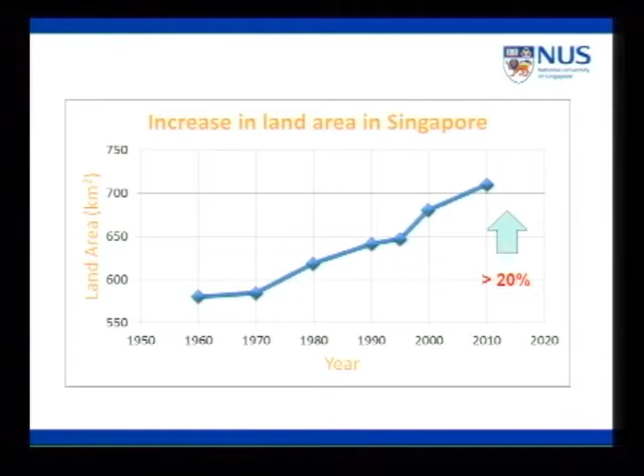Some of you may not be quite aware that Singapore started with, I'm just tracking the statistics from 1960, an island of an area of about 580 square kilometers. Over the past 50-odd years, the size of the island went up by 20%, and this is entirely man-made, by the way. I think this is a record for independent nations. I'm not sure whether there's any country that can grow at that rate. This is like the growth rate of a baby, right? But it is, to me, pretty amazing when I look at the statistics.

Now, this large-scale coastal reclamation essentially began in the 1970s in Singapore. We did have reclamation prior to the 1970s using some of the hill-cut materials in Singapore, but subsequently it immediately ran out of hills. That's quite obvious. No more hills for us to cut. And one of the very famous projects at that point in time in the 70s was Changi Airport. Not the current Changi Airport, the original Changi Airport. The whole project took place from 75 to 79, over a period of about four-odd years.

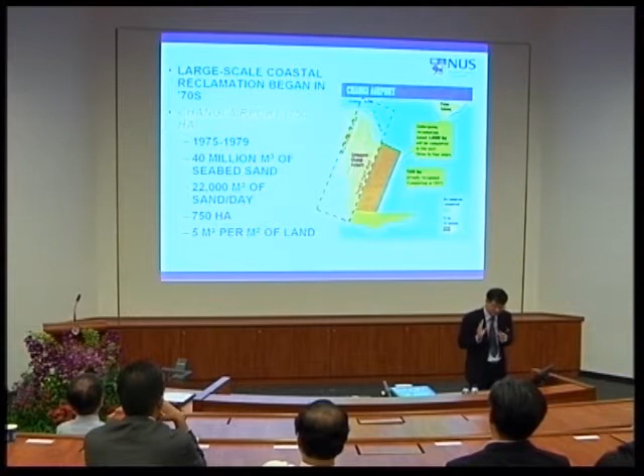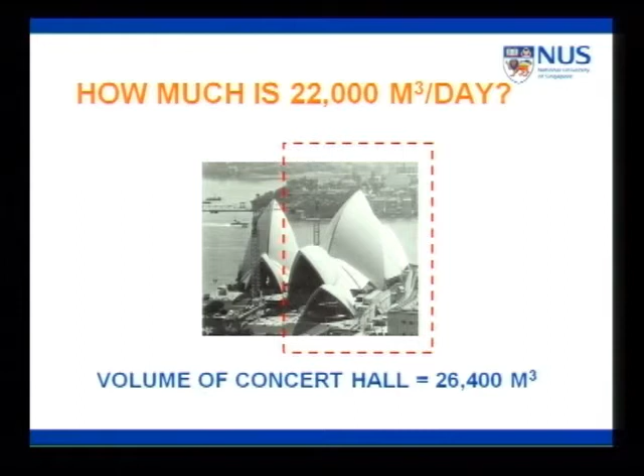How much is 22,000 cubic meters per day? I thought volume is not something that people can appreciate. So I just took one very famous structure, and some of you could have visited it: the Sydney Opera House. The Sydney Opera House would have a volume of 26,400 cubic meters. And if you look at the numbers I just cited, 22,000 cubic meters of sand per day, you're dumping a Sydney Opera House into the sea every single day.

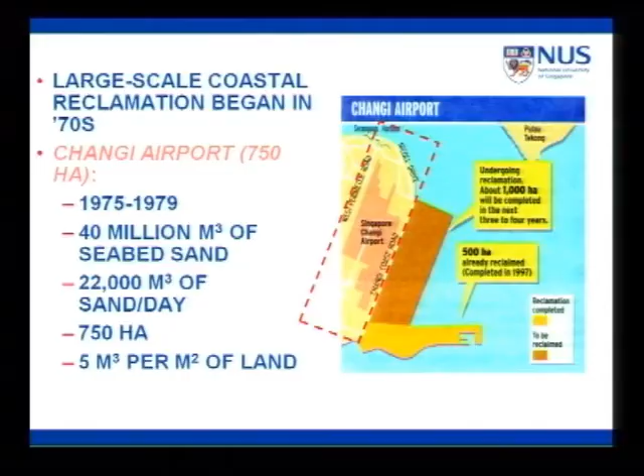That is a massive job, by the way. And many, many little things, very clever, very neat things that we can think about that we want to do, nothing works at that scale. The scale will simply defeat all your ingenuity.

I thought I would run through this, since not all of you are working in this area, and this is something that perhaps I could acquaint you with. The whole procedure of reclamation is quite simple. Imagine this is your original sea coast. You wanted to move your land laterally by this amount.

The first thing you need to do is to construct a sand key. That is to retain the fill that you will be dropping into this retained portion. And this sand key is something that I would actually skip to at the end of my lecture. So you want to bear in mind a sand key is essentially a retaining structure. And the way we do it is very simple.

We dig a big trench in the sea, and we replace this trench by sand. The reason is because in order for this structure to be stable, you need to have a solid foundation. So there's like a foundation to ensure the stability of the new shoreline. This is a very interesting picture. You notice that to do this piece of work, you already have to dredge seabed materials. And when you dredge this seabed material, by the way, you cannot throw it

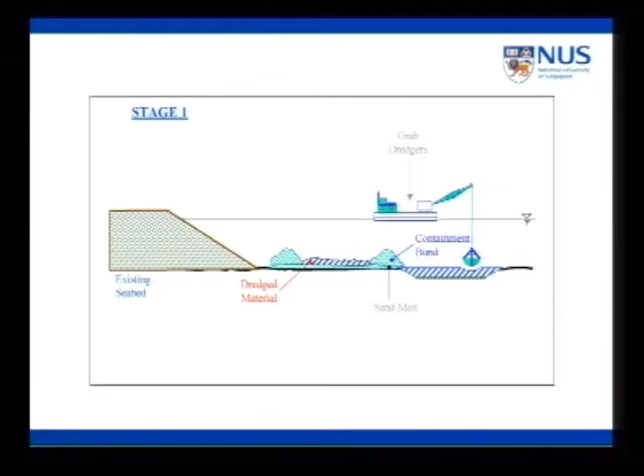elsewhere. Singapore is not only very, very small in terms of land area, Singapore has very, very tight navigational channels. The sea is being used for shipping. You cannot go around damaging these lanes. That is obviously not desirable. So the usual trick is to just dump the dredged material into this over a sand blanket, and then you basically rain sand on top of it using some fairly big barges.

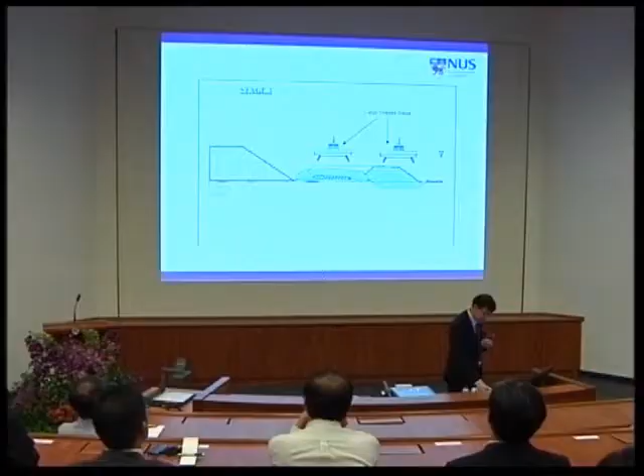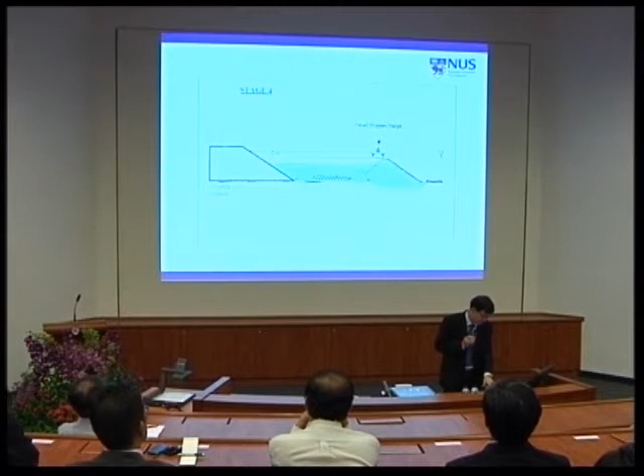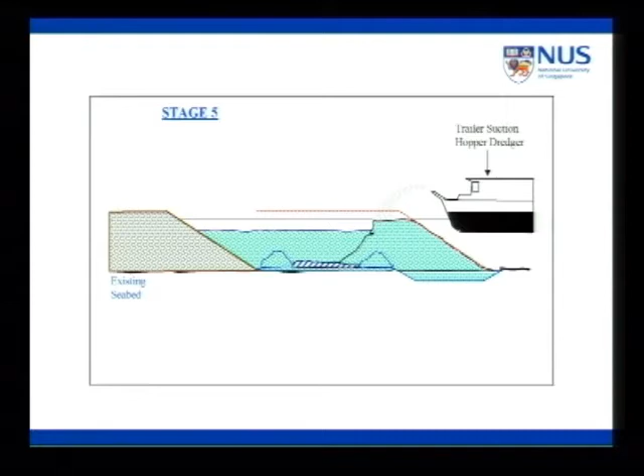And when the land rises near to the sea level, you bring in the smaller barges because you don't have enough draft for these barges to enter into these shallow areas. And then subsequently, it becomes so shallow that your small little barges couldn't come in. And you just keep raining sand using a trailer suction hopper dredger. So basically, these are all sand, hydraulic sand mixed with water, and you're just pumping this sand continuously.

So this picture is basically telling you how you dump this Sydney Opera House scale of sand to reclaim your land. That will give you a good impression, I guess. Now the story gets more interesting because notice that the original Changi Airport was reclaimed in the 70s. And then, of course, this entire construction procedure never stops. We were reclaiming land all over the place. So these are just some of the examples that I'm sharing with you.

For example, in Pulau Tekong, we did it in the early 80s, and that requires 5.5 cubic meters per square meter of land. The water starts to get deeper. This is common sense because the seabed has to go deeper, right? As you reclaim outwards, you have to go into deeper and deeper water. In fact, by the early 90s, roughly 10 years ago, in Changi East, the new extension, you are already dealing with 13 cubic meters per square meter of land. So you can see the trend.

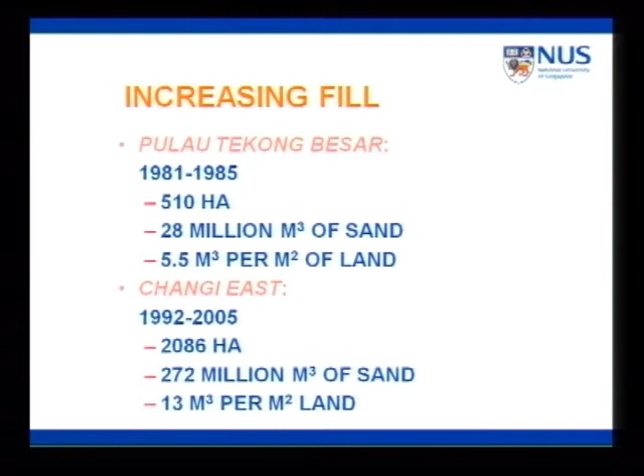The trend shows that it's getting more and more difficult because to reclaim that single extra square meter, you end up having to dump in a lot more sand. Now you're at a volume of 272 million cubic meters of sand. So if you add another zero, you'll be in the giga scale. This is no longer mega scale, but giga scale magnitude. And then this is very difficult.

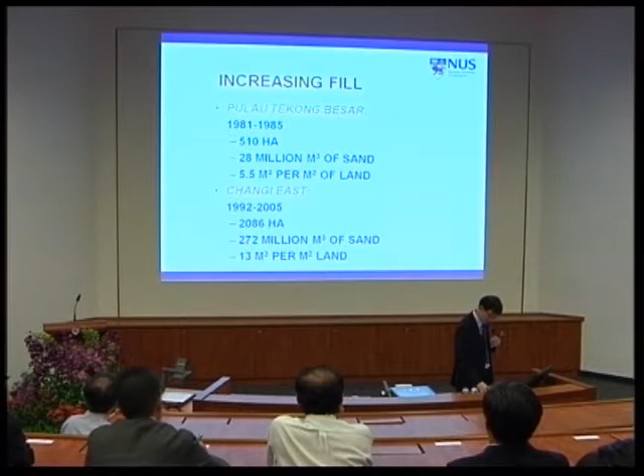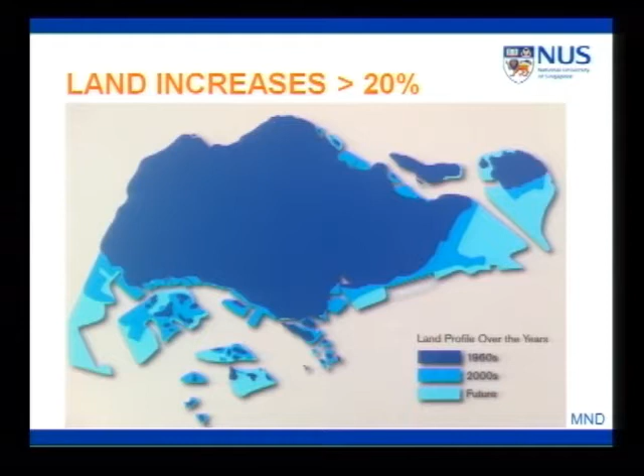As I've said, this may be a cleaner picture, the way I took it from MND. Again, it shows you very visually how fast we are growing and all the new pieces of land we are creating. That is very impressive, 20% as I've said just now. But the population of Singapore has also been increasing, as all of you know. We started off with something like 1.8 million people in the 1960s, and currently there are like 5 million inhabitants on this island.

So this is the rate of growth. If you take the extra piece of land and divide by this number of people, you will end up showing that despite this tremendous 20% growth in the size of our land area, we are indeed getting denser. This is population density: simply taking your population, divided by the land area of your island.

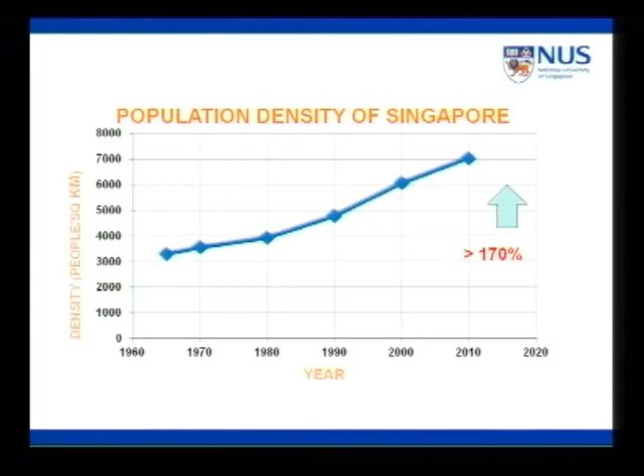And as I've said, this is 1.8 million in 1960, and then this is 5 million. If you just divide by the land area, the population density went up by 170%. So we are getting denser faster than we can grow the land. The statistics are very clear.

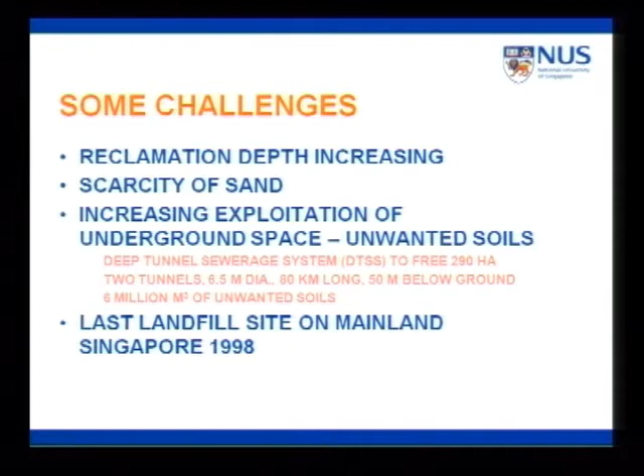By doing that, you actually free up 290 hectares of land on the ground surface. So this is very, very clever, right? You open up existing land space by moving facilities below the ground, but you generate 6 million cubic meters of soil in the excavation, and that has to go somewhere. And there's really no place for it to go in Singapore because we are very tight in terms of land use. Some of you may know that the last landfill site in Singapore closed in 1998. So a lot of our waste now is incinerated and dumped into Pulau Semakau, which is another reclamation project, by the way.

So I hope I've convinced you, running through this very brief outline of what has happened in the past, that the volume of fill needed for any reclamation work is really humongous. When we talk about, for example, this Changi East project again, I said it's about 272 million cubic meters of fill. It would require you to dump two Sydney Opera Houses continuously for 14 years. This is the scale. So the question we must ask ourselves is where do you get this mega-size fill? We don't have hills to cut anymore, as I've said.

And I could offer three options for discussion this evening. One obvious option is that maybe you want to bring sand from further afield. I'm going to use this number, 272 million cubic meters of sand, as a back-of-the-envelope calculation, just to look at what these numbers translate to. If you're going to ship this amount from elsewhere, pretend that we use 5,000 cubic meter barges. These are somewhat big barges that we're using nowadays.

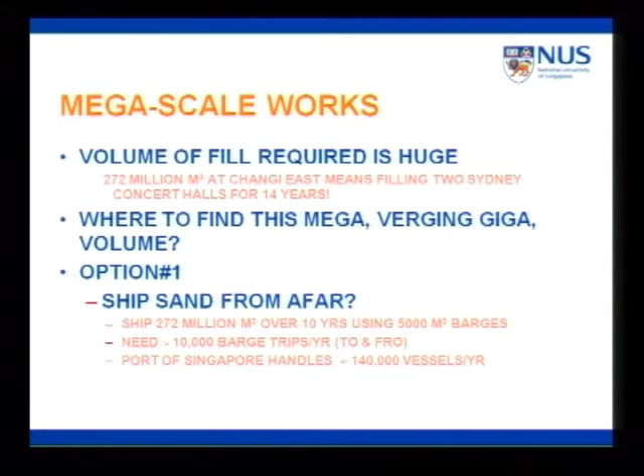If you do this over 10 years, this amount of fill would take 10,000 barge trips per year, because you need the barge to move to and fro from your reclamation site. Now, the Port of Singapore handles 140,000 vessels per year. That means you're taking up a big bandwidth of this vessel traffic if you wish to move this amount of fill.

I thought I'll bring in another interesting bit of historical tidbits here. You all may have heard about Operation Overlord. It's a very, very interesting operation. We call it D-Day, the Normandy invasion. And the D-Day Armada, by the way, consists of 6,000 vessels. Of course, the tonnage of the vessels is very large, but I just wanted to highlight to you, in pure numerical terms, the whole D-Day Armada is 6,000 vessels.

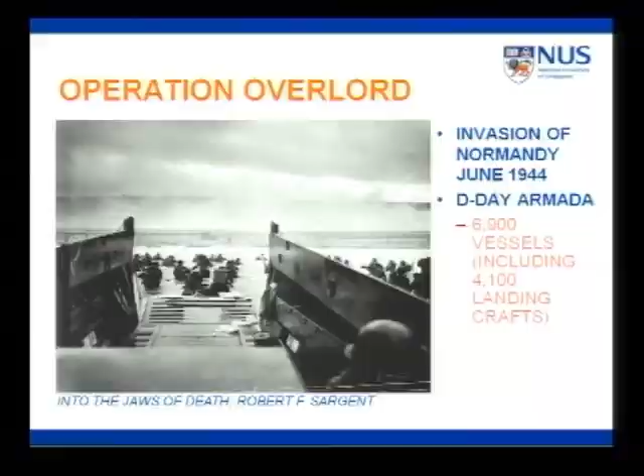You will be assembling a D-Day Armada every year to bring all this, and this is like in the past, this is a past reclamation project. So you're talking a lot of barges just to achieve this particular goal.

Now, the second option is for us to give up using sandy materials. And for something that big, the kind of scale that we're operating in, you need to think about natural fill. And the only natural fill that you can actually use at that scale is clay. So besides sand, you have to do clay. Actually, there's no option at that kind of scale. I'll talk about this later.

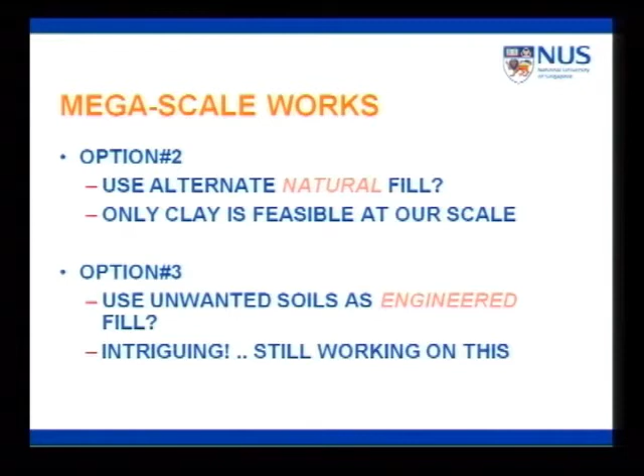In fact, a lot of our recent work has been done looking at how we can manage this material. This material, unfortunately, is not that great. You cannot use it like sand, just dump it with no treatment. I'll explain later. The third option, by the way, is to use your unwanted soil.

Again, this is very, very clever. By the way, if I'm not wrong, Prof. Tan and Prof. Liu have written papers on this. We have all this huge amount of unwanted fill, and you will be generating more and more of this if you wish to dig holes in the ground. So if you're going to do more MRT tunnels, if you're going to build this science city below Science Park, then this volume of fill occupied by this hole has to go somewhere.

Wouldn't it be really interesting if you just take that kind of material and dump it, and then you get new land, so you're getting two economic benefits for one action. But of course, unwanted soil is tricky, simply because it's random. You're taking it from many, many different sources. It is not the same as your natural fill, that is for sure. And you need to engineer it. This is actually a very intriguing option to me. We are still working on it, by the way. Not so easy, but the concept by itself is very intriguing.

For the next perhaps 15 minutes or so, I would like to go through some of these variations that we have studied. And some of these, as I said, were done by my predecessor. In fact, the first scheme I would like to discuss is the use of clay slurries. Clay slurry is just our technical term for muddy water, so there is a lot of water and very little soil.

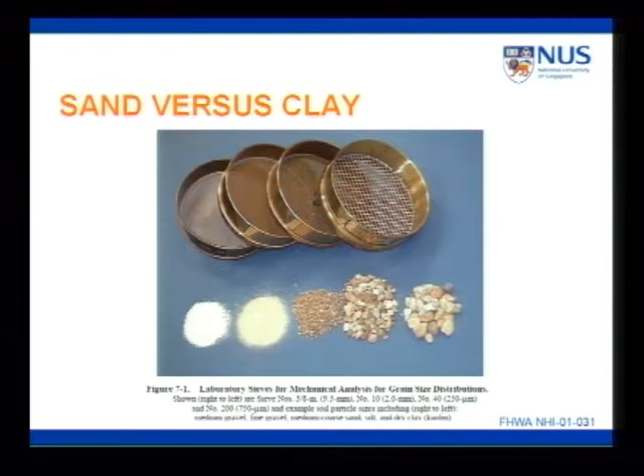But before I do that, since this is a general audience, I need to share with you, as far as reclamation purposes are concerned, what exactly is the difference between sand and clay? I show you this very simple picture: this is sand, this is clay. The primary difference in this case is size. And what kind of size differences are we talking about here? These are taken from our international standards. The key thing I would like to highlight is that for sand, the boundary is about 0.2 millimeters. This represents roughly the diameter of a fine sand.

If you're talking about clay, you're talking about 2 orders of magnitude lower. So internationally, we define clay-sized particles to be something like 2 microns. That's 2 times 10 to the power minus 6 meters, or 0.002 millimeter. Just to make sure that we are connected to that number, the diameter of a human hair will be in between these 2 numbers, about 0.02 millimeter. Very, very fine particles compared to sand.

And I'll show it to you another way. This is a 10 millimeter scale sand, very beautiful sand from the Gobi Desert. You notice that sand has a shape that is somewhat spherical. And as I've said, the diameter of the sand is of the order of about 1 millimeter or less. This is a scanning electron microscope image of our clay fabric at Pulau Tekong. So this is our Singapore clay, by the way. You want to know what it looks like? It looks like this close up.

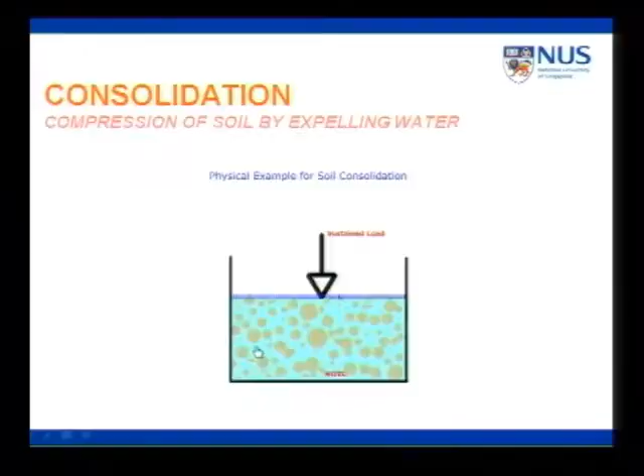When you're interested to use either sand or clay as a reclamation fill, all this fill will come with water. So this could be whatever your fill materials are. And because you're working right in the sea, they must be full of water, right? Now, the job here is to somehow think of a way to compress this material and drive the water out. You can't use the material as it is. All right, so this is just a cartoon to show you that essentially, to achieve a dense state, you need to do this.

Now in the case of sand, this is not a big problem. A simple analog that I would draw here to show you how this phenomenon works is to pretend this entire mechanism is like a piston with a hole. So it's a leaky piston. There's water in the piston, and then there's a spring. The spring represents your fill. So the idea here is that you want to apply a load, and hopefully you can squeeze the water out, and then the spring gets compressed. So this is a very simple model for you to visualize.

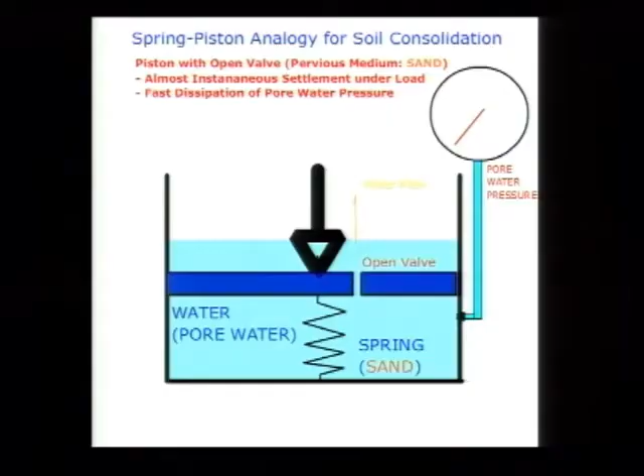And of course, in the case of sand, remember the size of the sand is of the order of 1 millimeter. The holes are also roughly of that order, 1 millimeter. Clearly, if you were to conduct this experiment, you will find that the water will flow out very freely. There will usually be no pressure detected within your fill. So this is a very, very good fill material. Hence, traditionally, all around the world, we try to use this so-called sandy material for this very simple reason.

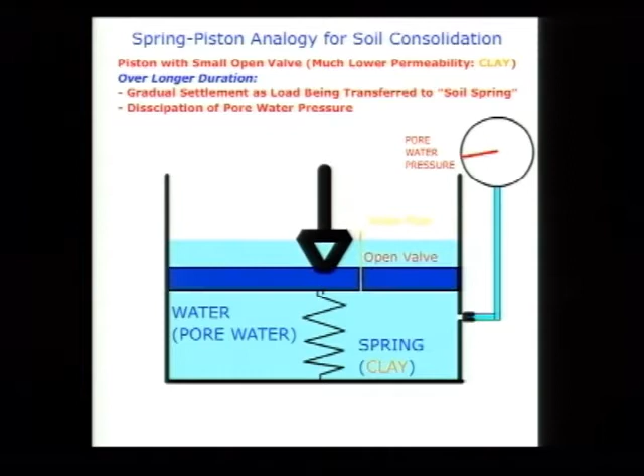Now, in the case of clay, maybe I went through a little bit fast. In the case of clay, if you were to apply the load, you'll notice that the hole here is very, very small. This entire process would also happen. In other words, you can gradually squeeze the water out of this little void space. But the entire procedure is very, very slow.

It's not slow as far as Mother Nature is concerned. I hope you understand that Mother Nature works on a geologic scale. Geologic scale, you're talking about something of the order of millions of years. And having this activity take place over millions of years is more than sufficient for nice things to happen. But that brings in the second constraint. The first constraint was a huge amount of fill. The second constraint is time.

No reclamation project will take 1 million years to execute. That is for sure. No one is going to pay you to get the job done in 1 million years. So we cannot do it by geology. You want to do it fast, you've got to think of a way of getting the water out as quickly as possible. That's where geotechnical engineering comes in.

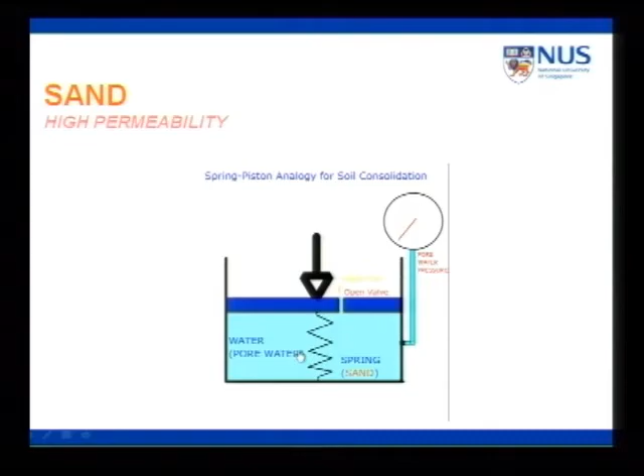By the way, there's an even more interesting analog that I always think about whenever I'm watching a movie. When you go and watch a movie, there's always an advertisement telling you what to do when there's a fire in the cinema. They'll say, everybody run to the exit and you must queue up to get yourself out. Actually, the whole procedure is like consolidation.

If there's only a little hole there, man size, and all of us try to get out now, we'll be knocking into each other, and only one person can go at one time. No doubt, it takes lots of time. If I open the entire panel of doors, everybody gets out quickly. So this entire consolidation is no magic. You think about that when you're watching a movie.

Don't ask me why I think about all these things, but I already told you researchers are obsessive. I can't defend that point. And sometimes we're also a bit too insane, but we do get nice things done.

I wanted to talk about this very clever idea, the so-called clay-sand sandwich scheme.

And the inventor of this scheme is Professor Lee. He's sitting in the audience, Prof. Lee.

I got to say something about Prof. Lee. Prof. Lee was the one who brought me into NUS. So I have him to thank for, I hope, Prof. Lee. You got me into this job.

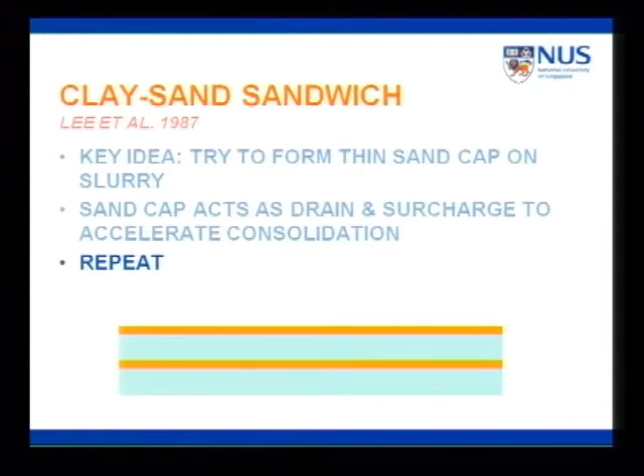By the way, Prof. Lee, I saw this thing being executed in Busan Port. They use the same procedure. We tried to tell them that we have done it, but they did not quite acknowledge it. So sometimes you get a bit upset when you see your colleague's clever idea being adopted, and then they said that they invented it. The only thing they invented that was very smart, Prof. Lee, was that they used bamboo mats to actually drain the clay.

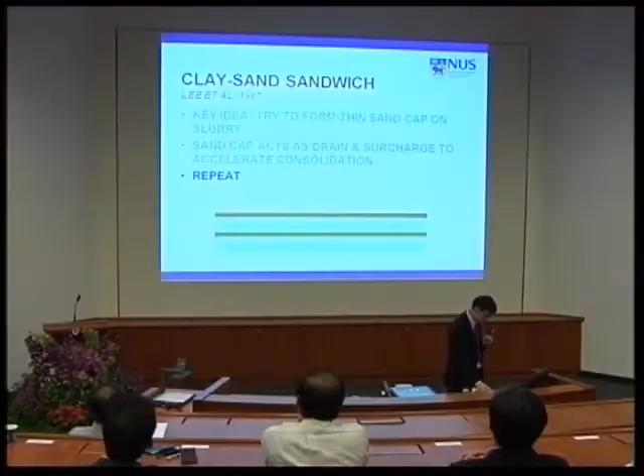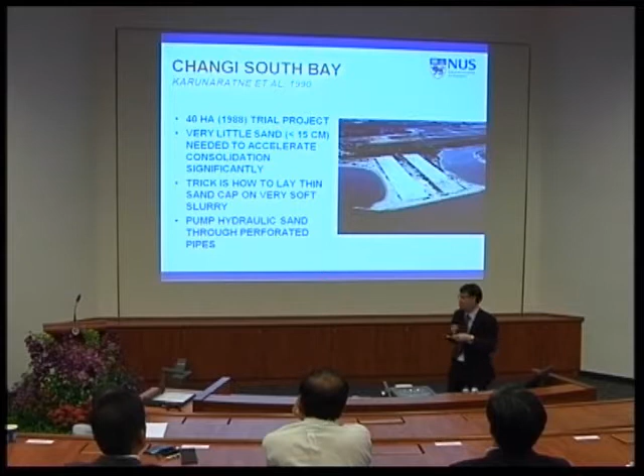By the way, all these things are happening at a port because at a port you got all this very soft slurry stuff that you need to consolidate into something useful. This project, by the way, also involved another person, Prof. Karunaratne, another senior colleague of mine, and he and Prof. Lee are in the same team, and they actually did it. So this is not just storytelling.

By the way, there are a lot of stories that we can tell, but the difference between storytelling and doing research is that you get the job done. The devil is always in the details. It's not in the general principle. And they demonstrated that this thing could be done. 40 hectares they did, beautiful piece of land. They showed that this thing can be done just using about 15 centimeters of sand, very little.

Of course, they found that the trick is how to get the sand to form a layer. If you put too much sand, you get too greedy and say, why don't I put more sand so that it becomes heavier and I can accelerate faster? Then the sand will go inside your slurry because your slurry is very weak. So you cannot put too much, you cannot put too little. Hence, I said the devil is always in the details.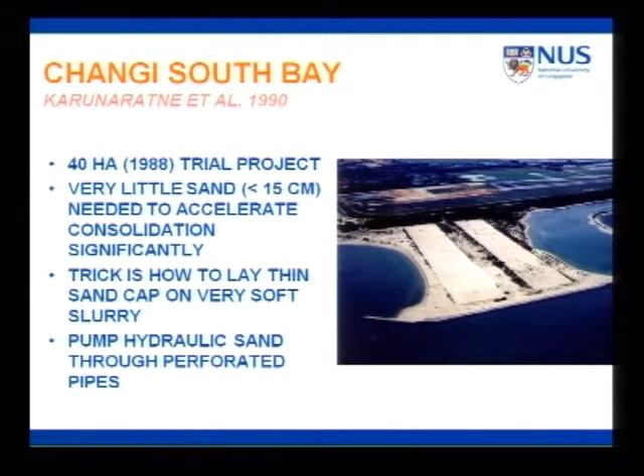And probably they also came up with a clever idea of spreading this sand using a horizontal pipe so that you don't dump sand the way you hose a garden. You do that, the sand will just go into the slurry. So they are very clever. They put this horizontal pipe that goes over the field and allows you to spread the sand in a uniform way. I hope I got your idea correct.

Okay, there is a limitation to this procedure, and that is that this procedure requires slurry, soft material. If your source material is not slurry in its original form, let's say you take excavated fill onshore, say MRT tunnel projects, deep excavation. I show you this simple picture. By the way, these are all drawn to scale.

This represents the typical water content of our natural clay. You can't see the water because the water is mixed with the clay, but I just artificially separate the clay solids and the water. So this represents, using this very simple phase diagram, your ordinary clay.

Now you want to convert this clay to a slurry, 200% water content. Slurry has water content higher than this, but I thought I'd use this as a lower bound just for demonstration. You add this much water there. So this is how much water you have when you're talking about clay slurry. And then you have your clay slurry, you need to remove the water again.

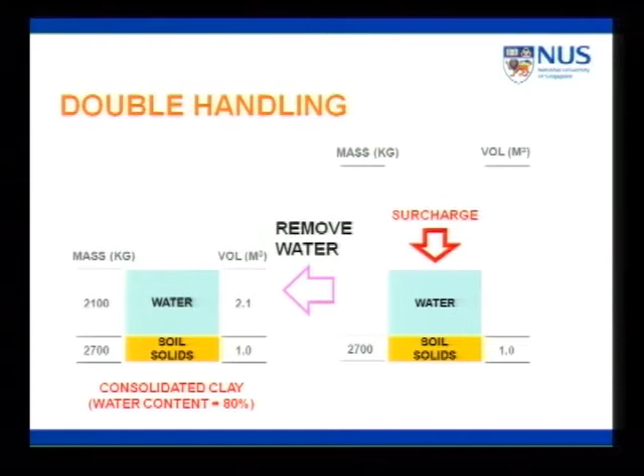Excuse me, you need to remove the water again to get back to your original clay by applying a surcharge. So what you're doing is that you're adding water to turn it to slurry, and then you're removing water to get back your original ground. Clearly, this is, in my opinion, probably not the original intent of this procedure. The starting point has always been slurry and not an original ground.

I wanted to talk about a very nice variation. Prof. Lee may have heard about this too. Prof. Lee's method is to put sand on top of clay. Why not put clay on top of sand? Just invert the thing. And then put some sand drains. Sand drains are just vertical columns of drains. You've got to apply suction at this bottom layer. Water will go into a sand drain. You will get your slurry to compress.

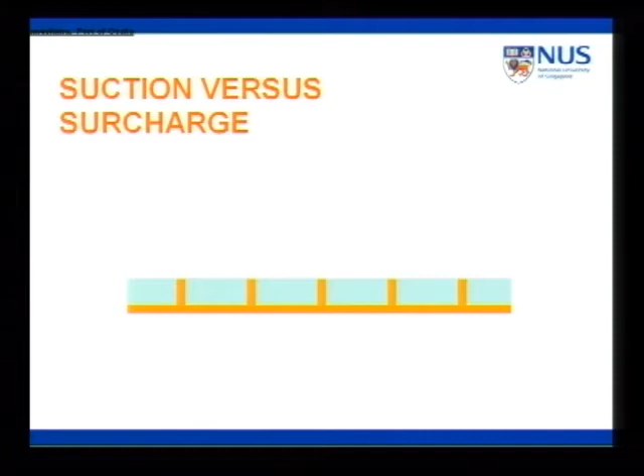Very clever. If you do that, you don't have to care about the sand dropping and penetrating through your clay because it's already at the bottom. So you won't have this problem. That is the advantage of this procedure. The distinct disadvantage is that you need to apply suction. Suction means money. Where do you get suction from? Suction doesn't grow on trees. You cannot get suction by using your own lungs.

It doesn't work. Prof. Lee's method, in my opinion, what is clever about it, if you can solve that thin layer of sand, is that he relies on gravitational energy, and that's free. Using the weight of the sand is free. Gravity is free. Suction is not free, and it's not easy to maintain suction either. Again, there are a lot of clever technical details here which I will not explain. But I want to tell you that the Japanese have done it.

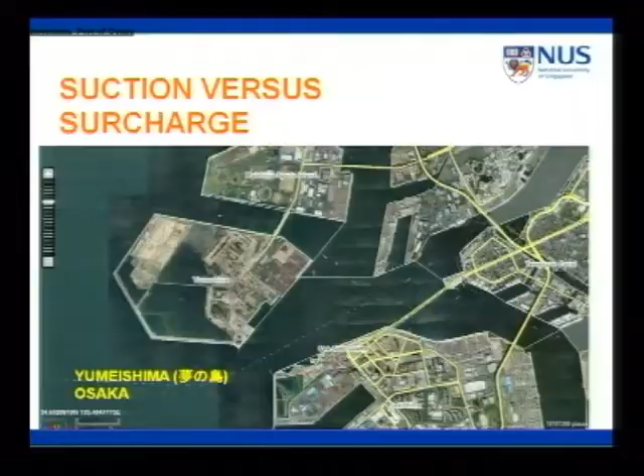I think Surumi-san may know about this island. It's called Yumeishima. Shima means island in Japanese. I went to this site about 10 years ago to visit this reclamation site. In English, and those who can read Chinese can see, this is called the Dream Island. Interesting. It's called the Dream Island, but actually it's made of landfill. So I think the name is very innovative. We should have called our landfill Dream Island also. It gives better PR than saying it's a waste field. And they did it as part of their bid for the Olympics, which I think Japan failed to secure. But I think this project is still ongoing.

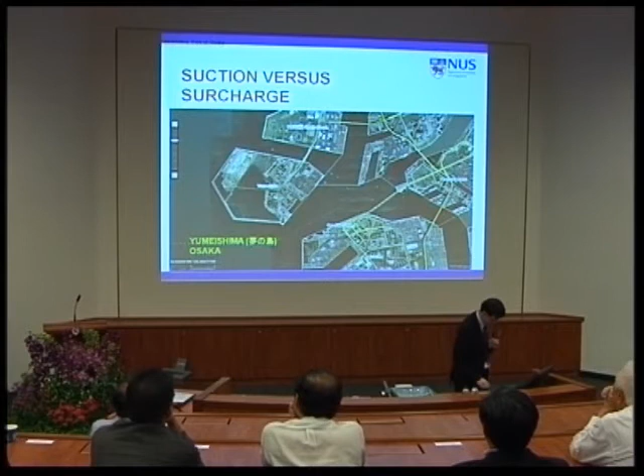That's what they did using suction, but this is not reclamation, by the way. This project's primary intent is as a waste dump. Every time you get excess slurry, you throw it in there, they apply suction, they compress, and then they repeat the procedure. Eventually, when you top out the entire containment pond, you get a free island. The Japanese told me they're going to change it to some kind of golf course and build beautiful resort housing on it. So maybe my wife and I would go one day to Yumeishima. Remember this, very nice.

Now, we talk about clay slurry, but that's provided you have clay slurry. Remember, I mentioned that eventually we'll deal with all this unwanted material coming from underground sources. These are fairly stiff, by the way. I just use a term called clay lumps. These clay lumps appear if you excavate from underground construction, even if you go to the sea and start dredging. The mud is only very soft near the surface of the seabed. The strength of the clay actually increases with depth. It gets stronger and stronger.

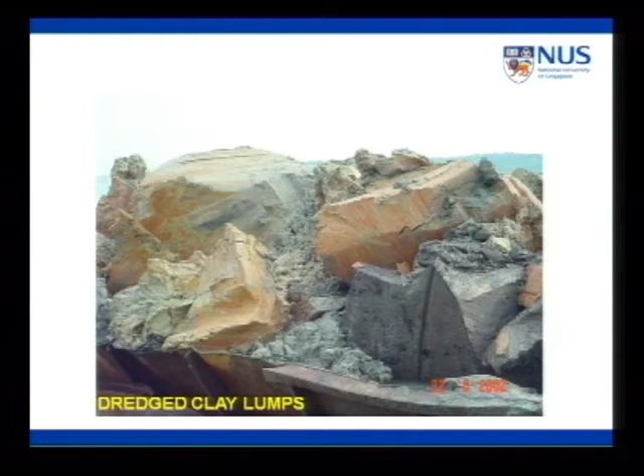And you end up with all these boats full of all this lumpy clay. As I've explained, this lumpy clay has a water content of maybe 80% or so. And well, would you really want to take this stiff clay, mix it with water, make it very soft, and then repeat the entire procedure? Why don't we think about just dumping this into the sea directly without additional pre-treatment in its original state? And this is done actually, I think it was about 5-6 years ago.

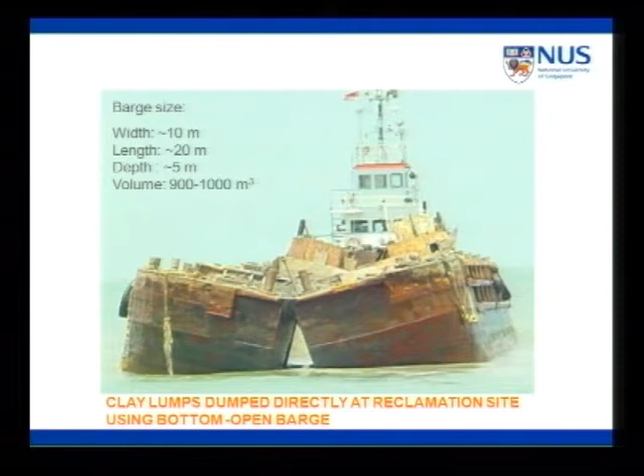There was a site in which we tried taking these clay lumps and dumping it. Very interesting barge, by the way. We just opened a barge from the bottom, and all these lumps would drop into the reclamation site.

But again, as I tell all my students in all my lectures, in this world there's no free lunch. Any clever idea you think about, Mother Nature will think of an even more clever idea to stop you. I think all the researchers know that. Hence, as a researcher, we need to be very, very patient. And as I said, we need to be insanely optimistic.

When you deal with lumps, the main problem is that the lumps cannot be arranged in a matrix, like a natural clay, where there's no void. Because the lumps come in random sizes, random shapes. And if you dump them, you may get a shape like this. And therefore, there are these voids between the lumps. By the way, the voids between the lumps are big, right? Say 1 meter. The voids between the lumps will be of order 1 meter.

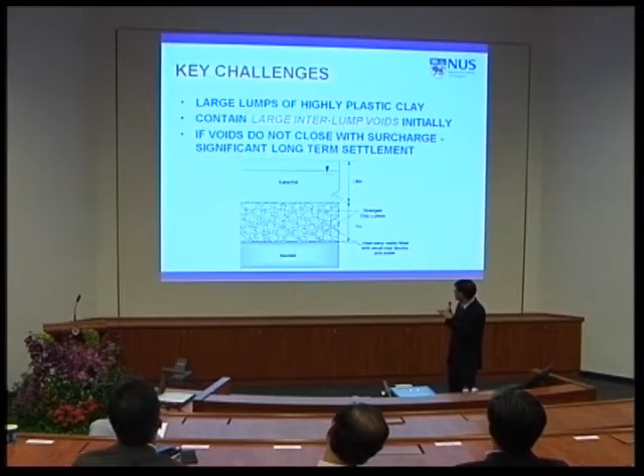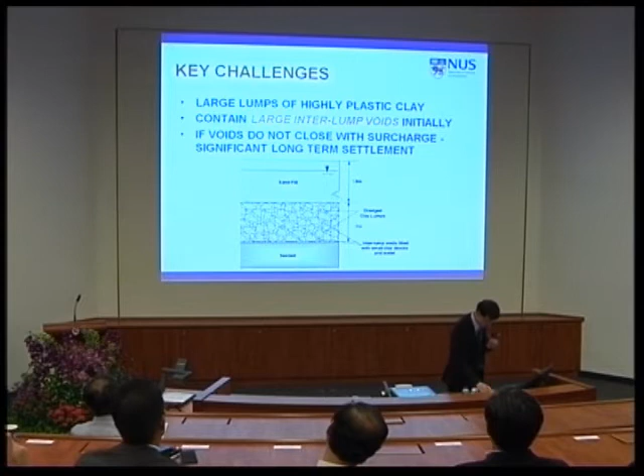The voids inside the clay, remember, clay is 2 micron. You're talking about 6 orders of magnitude, if I'm not wrong. It has little voids in there as well. This is a system where there are 2 voids, what we call a double porosity system. A very, very highly nonlinear system if you're analyzing this, because the voids within the clay are a lot smaller than the voids between the lumps. These are huge. And of course, the primary concern in this particular project was to take note whether these voids were closed.

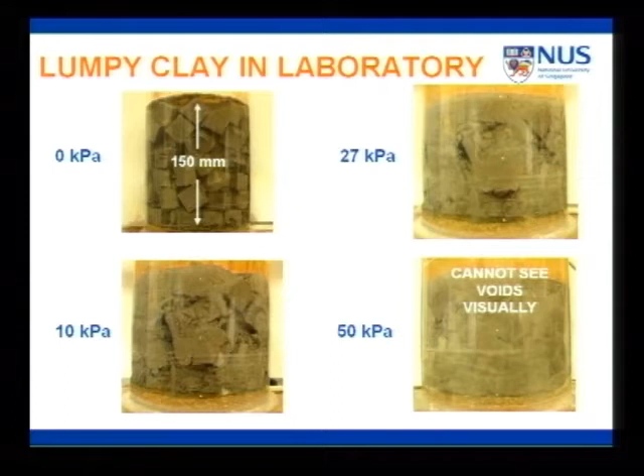So very quickly, maybe I'll show you some of our laboratory results, just to show you what we did. Of course, we're using fairly small scale samples, about 150 millimeters. These are not big scales. And what we did was apply load on top of these lumps. And what we noticed is that by the time we reach something like 50 kPa, at least visually, we cannot see the presence of inter-lump voids, but this is only visually. What we decided to do is a permeability test, to see how well water would be transmitted through the lumps.

So if you have voids that are connected, water will flow through very quickly. Water is not very dumb. If there's an open channel, water will flow. Water will not bash its head and try to go through all those little voids. That is like very stupid water. Our water is very clever. So if there are voids and the voids are interconnected, permeability will be very high. If the voids are no longer connected, the permeability will be very low.

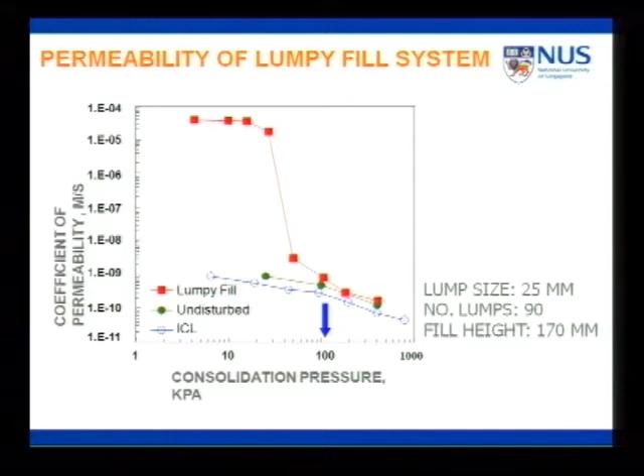In fact, permeability will be controlled by the permeability of the original clay. So when your lumpy fill, which is the red dots, converges to your green dots, the natural material, we think we have closed the voids. But I think the problem here is that I use the word connected voids. So we are still not sure; there may still be voids, but they are not connected, so they cannot be detected using a permeability test.

So we decided to go bigger. By the way, these are all heartbreaking tasks done by our graduate student, Dr. Kati. I acknowledge him. I'm not sure whether Dr. Kati is here. He's probably not here. We are now using lump sizes of 200 millimeters in a huge tank. And what we did next was monitor the compression of this lumpy fill as we apply load.

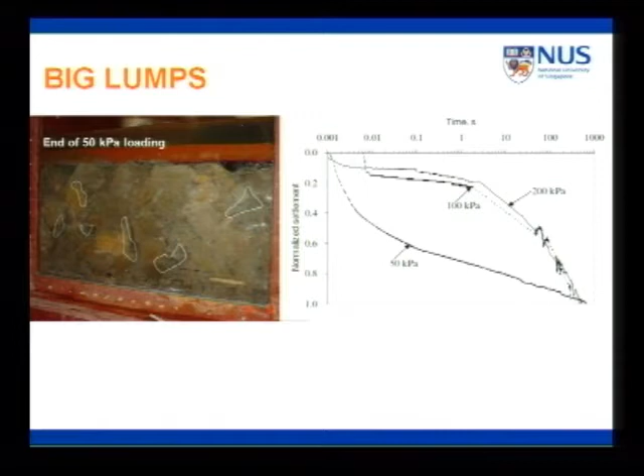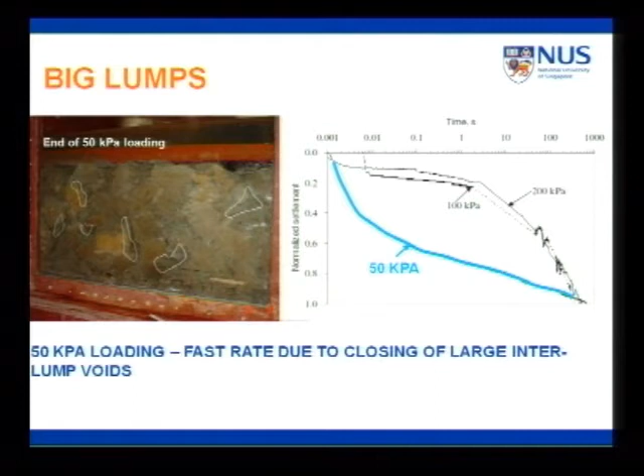So this is another way in which we are trying to argue that perhaps by applying 100 kPa of load, you can get rid of this so-called inter-lump void problem.

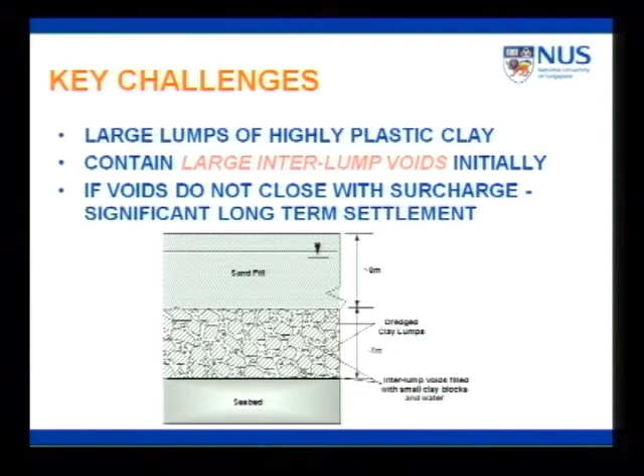Now, this technique, by the way, has been done also, and it is effective. We've actually done it, and we've actually succeeded. This particular picture that I show you has been done. This is not a schematic. We actually have a reclaimed land using these clay lumps, 8 meters thick. And what we did was that we put another blanket of sand 8 meters thick on top to act as a load to compress this layer of lumpy fill. So we have done that.

I'm perhaps running a bit slow. I'll finish up very quickly now.

The thing is that you need time. There's no doubt about it. You need time for the clay to swell, for the clay to slowly soften, and then slowly for the void spaces to close. You need that. But the other thing that you need is a lot of sand. You actually need more sand than the previous clay sand scheme that I just mentioned. I told you we're using 15 centimeter layers, but here you're using 8 meter layers to serve as a dead load to compress this clay material. And I already mentioned in my introduction that we don't have that much sand.

And the other rather significant limitation is that you cannot put this lumpy fill above water level. One of the things that we found was that this lumpy fill needs to be submerged underwater so that the clay lumps could swell and soften, and by doing that, the interlump voids will close a lot faster. So putting it above sea level, that will not happen. Now, this thing about building land above sea level will come into place later. It's going to be quite important. I will talk about that at the end of my presentation.

So what we do now, we are almost at the current stage. We are exploring the use of slurry. So we are back to square one again, except that our slurry has lower water content than what Prof. Lee has suggested in the past. And we are going to add a little bit of cement. This doesn't sound very innovative, but the thing that we are trying to do now is to use as little cement as possible. Clearly, when you talk about adding cement, if you just add a few grains, you can't expect magic to happen. That will be very strange.

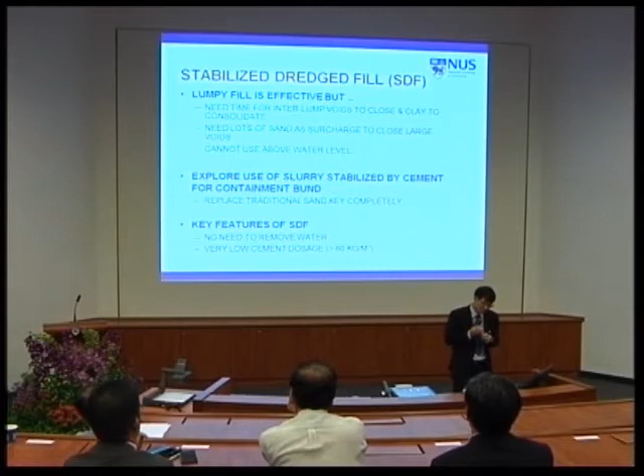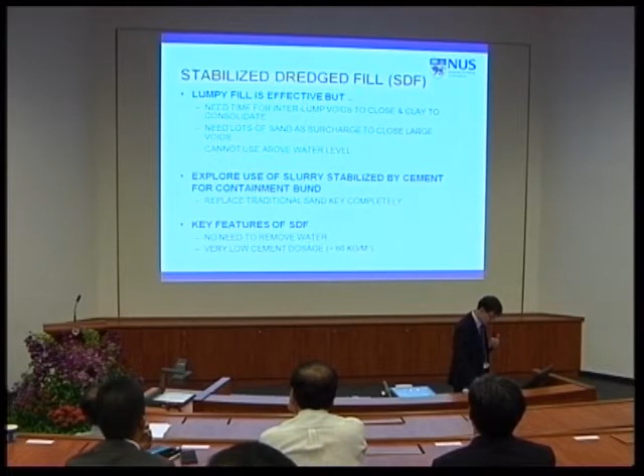So you need to add a certain minimum amount of cement content. The cement we're using is almost on the verge of the thing not working. So it's on the verge of working or not working. We are trying to optimize the use of this cement to see whether we can produce a product that is usable. We call this a stabilized dredge fill. As I've said, the key feature of this proposed solution is that we do not need to remove water. That saves a lot of time.

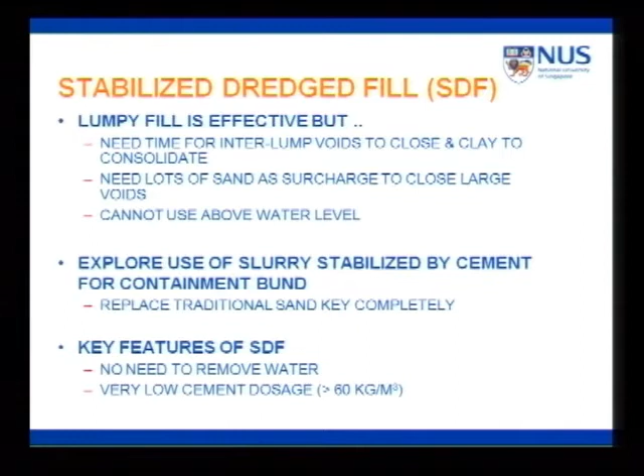The water in this case is being used to react with the cement. So you have back your same figure, soil solids and water. You add a little bit of cement. The magnitudes are given here, very little, compared to the amount of water and clay that you're using. And based on physical chemical change, which I will not describe, you end up with an entire solid cement clay product. And that's your fill. There's no removal of water in this case. Essentially your cement will react with the water and the cement will react with the clay.

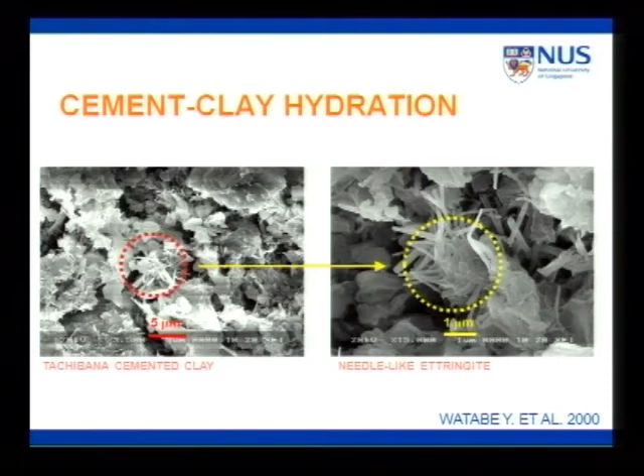It's very interesting. This is a scanning electron microscope picture. I took this from my good friend, Dr. Watabe, from Port and Harbour Research Institute in Japan. And this is the kind of clay structure that is being formed. These little needles are basically a material called ettringite. Ettringite is something that you see even in concrete when cement hydrates. So it shows that cement is working well with clay. You can form a product that is not separate. Eventually, because of this chemical hydration, you actually form a new engineered material.

Prof. Charles says that I need to show you some big projects around the world and not just talk about Singapore. So, Prof. Charles, I'm doing this slide for you. This particular piece of work has been done in Japan, except that they're using different methods and quite a lot more cement because of the dredged clay material around, by the way, this Haneda Airport, I forgot to mention. You know, Haneda opened a new international airport, I think maybe 2 years ago, if I'm not wrong.

And now, you can actually fly to Tokyo. Haneda is a Tokyo domestic airport. Now you can actually fly to Tokyo from Singapore through Haneda. You don't have to go through Narita. Narita, you will take, I think, an hour or so to reach Tokyo.

The only thing that is very important here, by the way, just to sidetrack a little, the Japanese taught me this. If you're landing at Haneda, you must make sure when you land, it's during daylight hours, so that the MRT is running, the subway is running. Because if the subway is not running, you land there, then you're dead. You know why? Because you cannot afford to take the taxi to the hotel. You better learn this trick. When my Japanese friend told me that, I immediately memorized. You don't want to sleep in the terminal for nothing. The subway system doesn't connect to the airport operating hours.

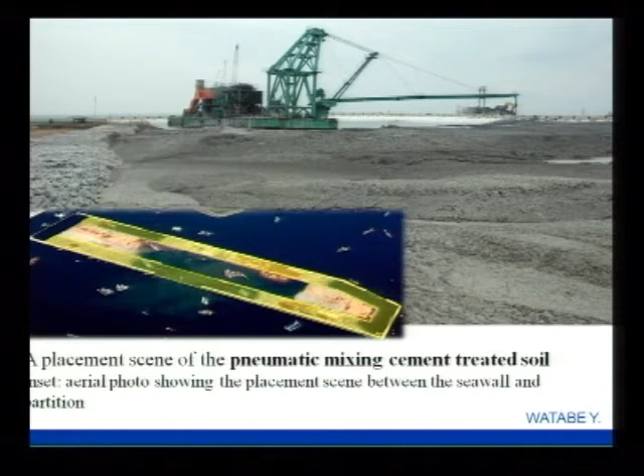Very interesting technology here. And they have actually used some of this particular material as a fill. The entire perimeter of this airport has been filled with this cement-treated material. So I think this is enough to show that the concept works on a real scale. This is the structure that we use in Singapore. I'm not quite allowed to say where we are doing all this because the project is ongoing, but this is to tell you roughly how this material is being done.

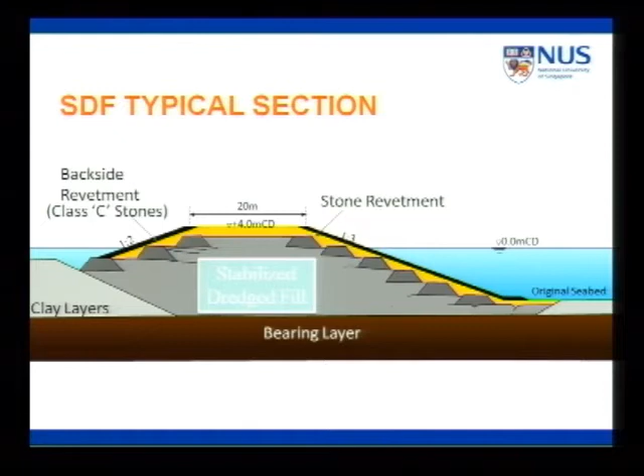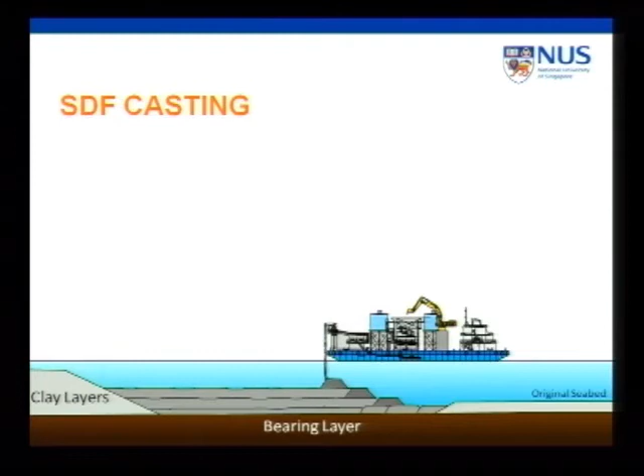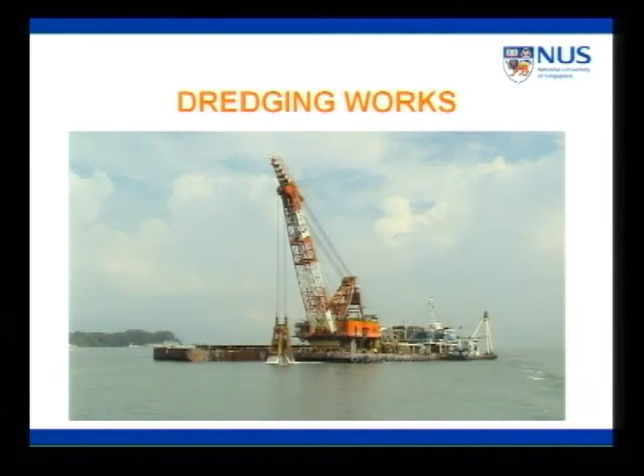Essentially, we're using this material to replace the sand key. That was what I told you at the very beginning of this lecture. You need a sand key to retain the new coastline. You need it. And what we're doing now is that we're replacing the entire sand with this what we call SDF material. And just a few quick pictures to show you how this SDF machine works. Essentially, you build all the little dikes, and then you just come in and you start casting. So it's a bit like casting concrete. And finally, you put in your stone revetment, and you have this containment structure.

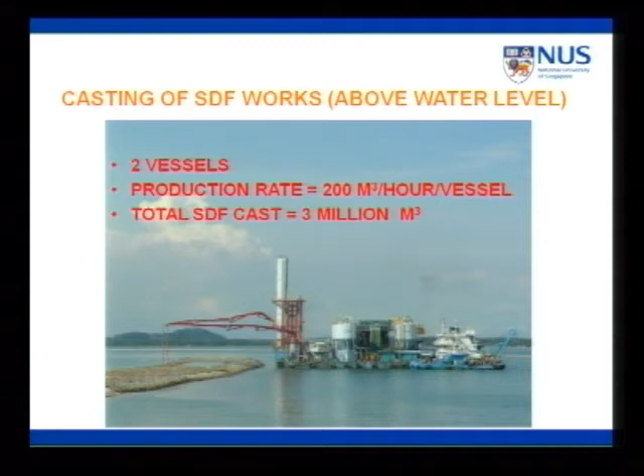Just a very few pictures, so that I won't take up too much of your time, to show how this thing works and how the casting works on site. Eventually, all these things would surface. When you cast a sufficient number of layers, eventually they will daylight, and you will see them appearing on the surface. What is interesting here is that the production rate is pretty high. You're talking about something like 200 meter cube per hour per vessel.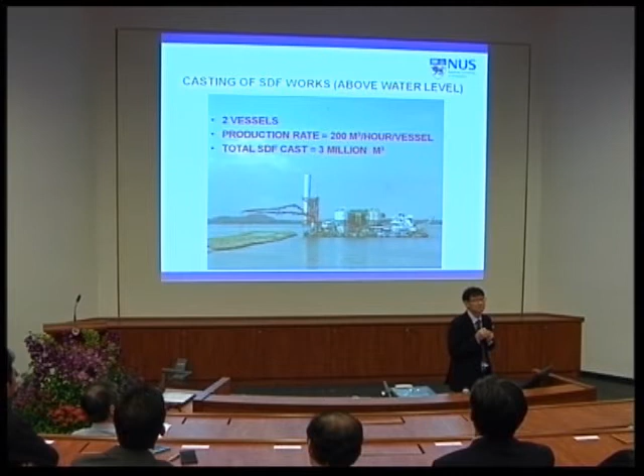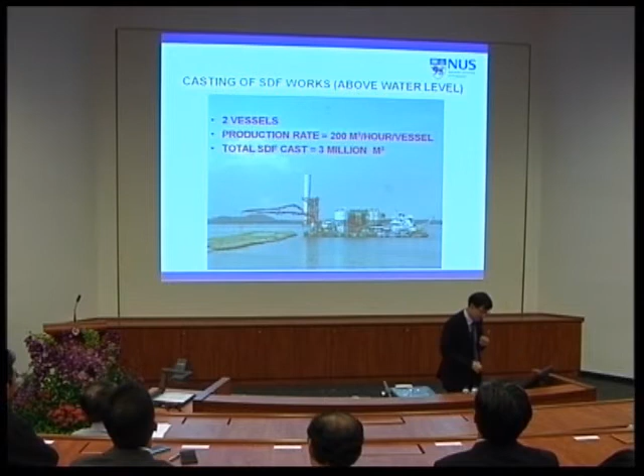So roughly, if you do it continuously, say for 20 hours in a day, you will get 4,000 meter cube. Within 5 days a week, you will get your Sydney Opera House. 4,000 times 5, 20,000 meter cube. So this is something that is doable. And so far our experience is that we have cast 3 million meter cube. We have found two very interesting features of this material. I'll share very quickly with you.

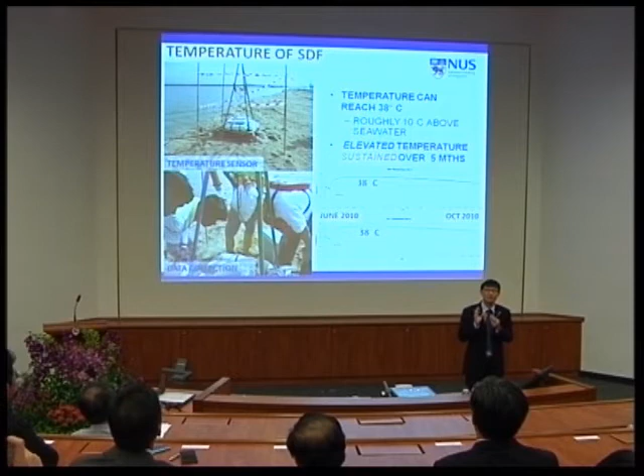And one is that because you're casting so much material, and because this is a chemical reaction, you actually generate temperature. The thing becomes hotter. You know, our sea water temperature is perhaps about 28, 30 degrees. What we found when we put a temperature probe into this material, because this is a massive material, by the way, you end up with 38 degrees. And this is sustained over 5 months, over the period of measurement. I think the temperature measurement is still ongoing.

So the material is gaining strength very quickly, by the way. When you heat a material, this material will just accelerate its rate of strength gain. Now, this is a very important point I'll come to later. The other thing is that I told you this is an engineered material. You know, human intervention involved in creating the fill.

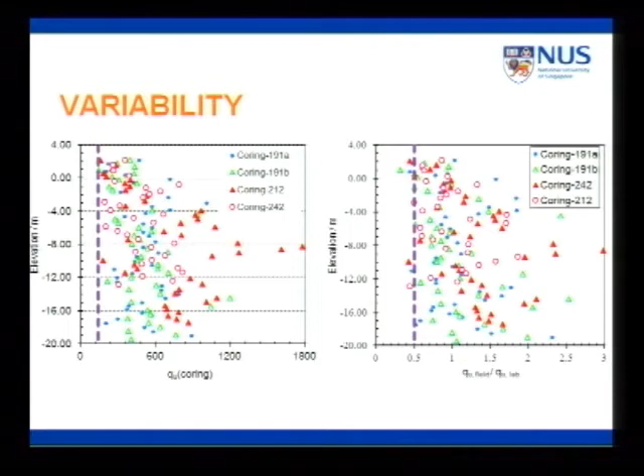So the beautiful thing is that we generate results that look like this, highly, highly scattered. It shows that we need to do something about it. Currently, what we are doing is that we want to make sure that the minimum value achieves our design target. But you can see that there's a lot of room for improvement here. By the way, this scatter is not because we are doing the job poorly in Singapore. I took the same set of data from this Haneda airport, Dr. Watabe, same scatter in Japan.

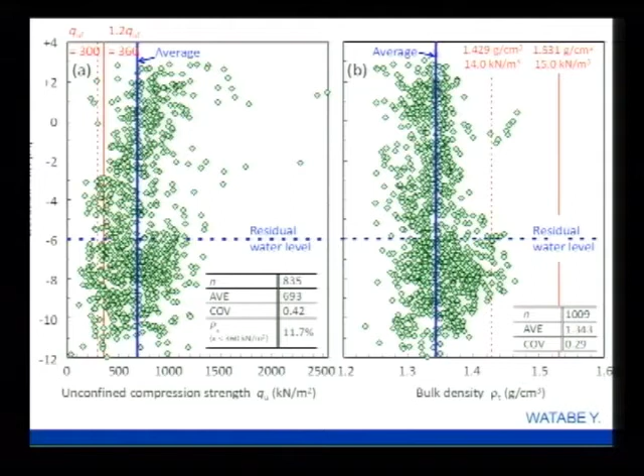So this is an inevitable outcome of our using engineered fill. How we go about treating this is interesting. It's actually something being studied because this is not homogeneous. Clearly, this scatter will affect your engineering design. And we need to perhaps think of a new engineering design approach as well.

In fact, one of the things we're working on now, just to draw a schematic, as I've said, we use this so-called elevated temperature as a technique to think about whether we can use it as an early quality control device. We need to have quality control because you have scatter, number one, I've already said. And secondly, on the actual site, the temperature of the material is also high.

Of course, the big thing that will occur to you immediately is that if on the 28th day you found that this material is not so great, what are you going to do? There's a huge amount involved. Are you going to excavate out the material? That thought should not be in your head. It's quite scary, actually. We can't actually do a test to verify the strength that we are designing for. We can't do it the usual way using this kind of simple, what we call the unconfined compression test.

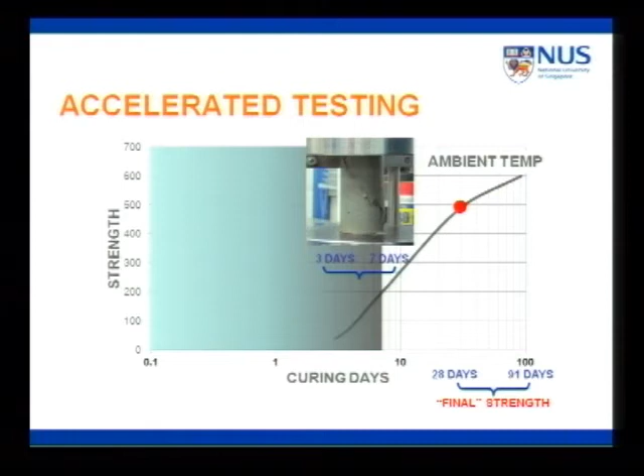Our limit is about 3 to 7 days. So in 3 to 7 days, we can get an indication using this particular test. But 3 to 7 days is still a long time. So now what we are trying to see is whether we can gain an early indication of strength, 1 day or less. We are pushing it, and our idea is a very simple idea, and it works very well, by the way. We cook the sample.

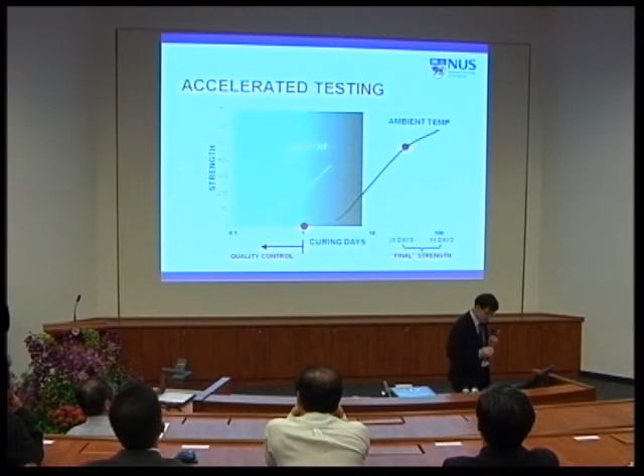So now we are into cooking. We take the sample, we cook it, heat it to 60 degrees, and now we are doing higher temperature. And remember, if you cook the specimen, you can get strength gain very quickly. So perhaps within a day, you will gain some strength that you can measure. And you see whether you can find a relationship between your desired target and this early strength. This has been done, and actually we found that it works, surprisingly.

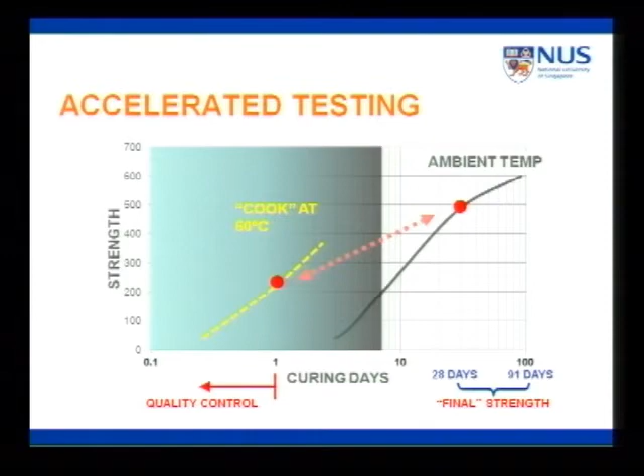Of course, the original thought is that if you cook the thing, will you crack the thing? Will you induce thermal stresses and damage the specimen, so that the cooked specimen has nothing to do with the original specimen? It's like cooking an egg, right? Hard-boiled egg and raw egg, not the same. So that was our worry.

But as I've said, we demonstrated, and I think this is the only technical slide I have. This shows you your normal so-called uncooked specimen. This shows you the accelerated specimen. And we also tried using interesting measures of the stiffness of the specimen. We found that there's a very nice relationship, very surprising. And we are able to get a clear-cut estimation of your 7-day and 28-day strength before 7 or 28 days.

So if anything happened, I think we've got a chance. At that point in time, the specimen at the actual site is still very low strength. You can now contemplate taking out so-called defective material without having nightmares or turning your hair white.

So I think I'd better stop here because I've run out of time now. I wanted to have one final slide to talk about the kind of thinking that we're having now. As we work on this, we keep finding new problems. We keep finding new solutions. As I've said, there's no end in research. We are always trying to take an incremental step into the next envelope. And you can see that basically Prof. Lee passed the torch to us. We have to pass the torch to another younger group of researchers.

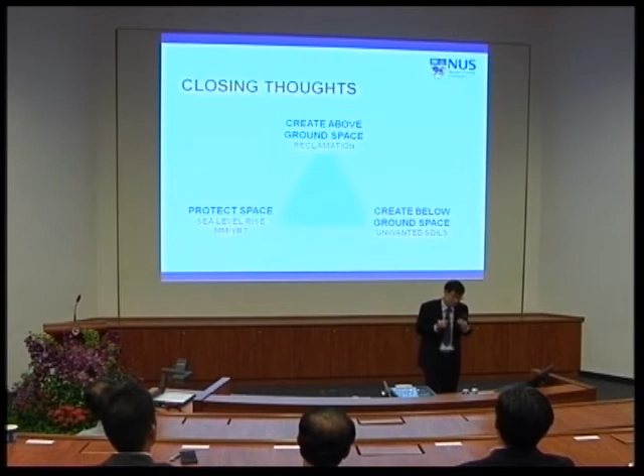So we are now struggling between these three things. If we can do something about these three things together, I think we are contributing to nation building in our faculty, among our colleagues here. Those who are involved, we could potentially do something that will be useful for posterity.

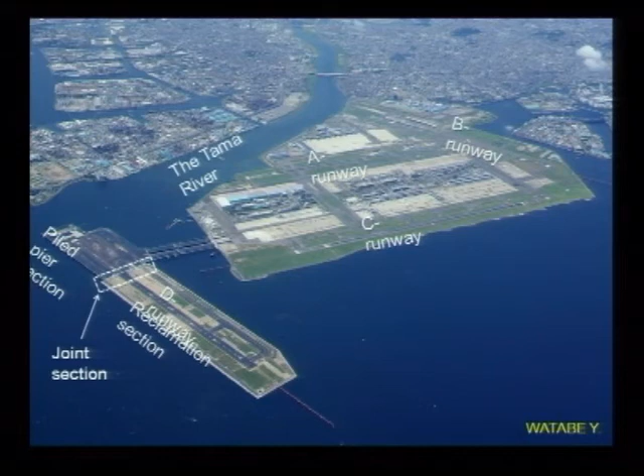As well? Yes, estuaries. In fact, the Haneda airport has this river, the Tama River, so they got a lot of soft stuff here. A lot of the clay they used to reclaim this airport was from all this soft material. So do we buy slurry from other places? I think if we can carry fill of any nature, we will try to carry sand.

It's interesting, by the way. This will not be part of geotechnical engineering. Probably the hydraulics engineers; Prof. Chan is an expert. Carrying all this sludgy material on big boats is a hydraulics problem. If Prof. Chan can crack this problem, he will solve another major problem for us.

You see, civil engineers are very useful. I want to say that.

Okay, any more questions? Hi, I'm a student from NUS High. I'd like to ask a question: in land reclamation, do you see the possibility that one day we reclaim land to a point where our lands connect with the neighboring countries?

I can see that NUS High is training very bright students. Oh man, I don't quite know how to answer this. In fact, when I suggested this topic to my partners, my partners politely told me not to talk about certain things. So this is one of the out-of-bound topics I cannot talk about.

Yes, Prof. Liu, yes, please. Under international law, you can go all the way to the international boundary. So in some of our reclamations, we push all the way close to the boundary. So the limit to our reclamation is actually the international boundary. No secret.